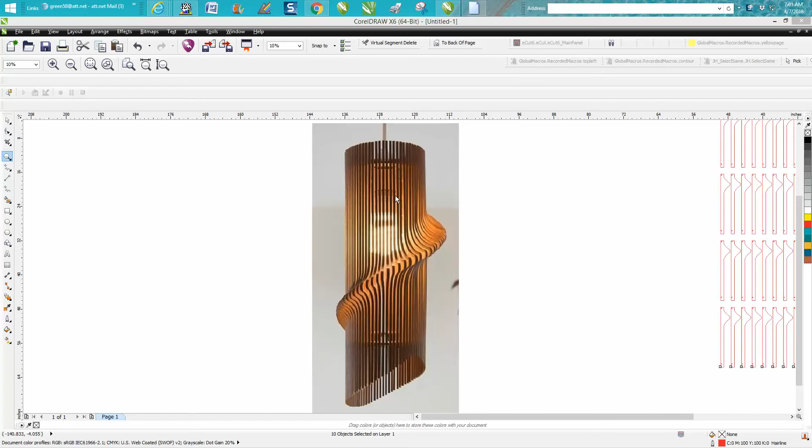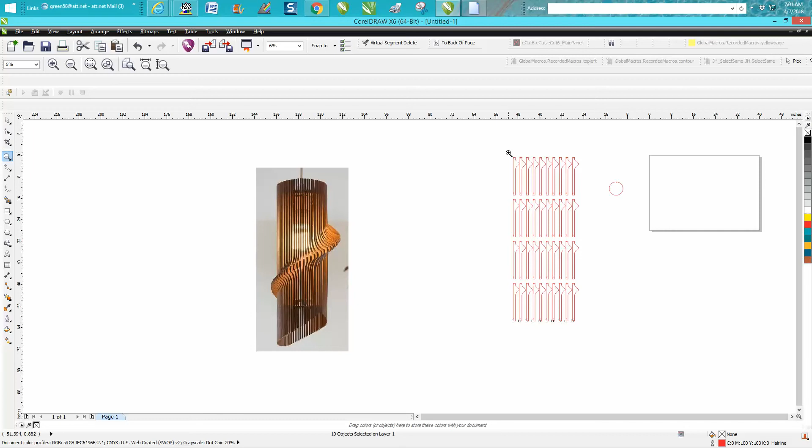You just kind of think about a couple of things, and you have to do some test cutting. And here we go. We're going to design one of these real quick. I have no clue how many vertical pieces are in this. I'm going to say there's 60. I'm going to draw one with 40 because this could be a lot longer than I think it is. So I'm just doing one that's like 14 inches tall by 3/4 of an inch across.

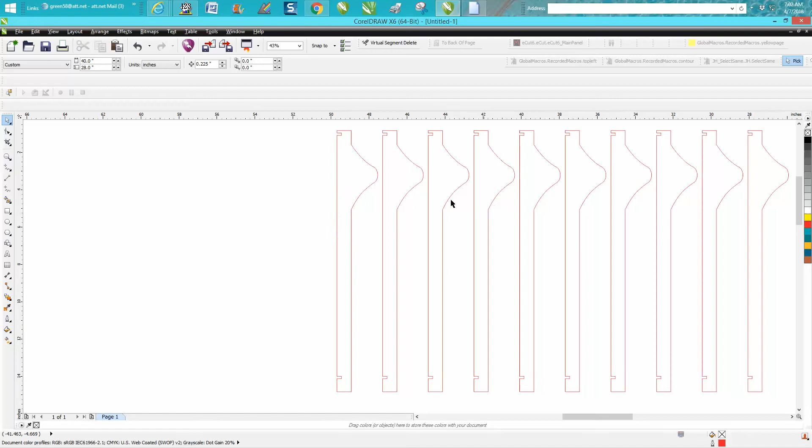So all I did is I drew out the vertical pieces. I put notches, and this is where you'd really need to test your notches before you cut out 40 of these or 60 of these. But then just draw this shape, and I'm not going to get into how to draw that shape. I just added some nodes, and that's one thing about designing. It would be your deal. But let's talk a little bit about how we're going to draw the center part, what's going to hold these together.

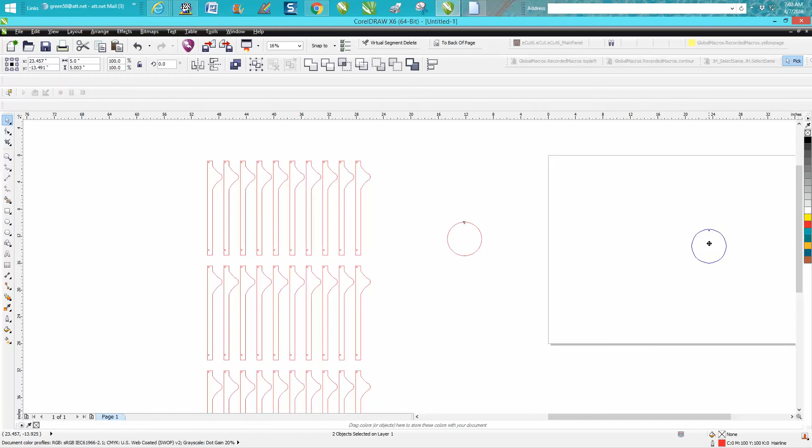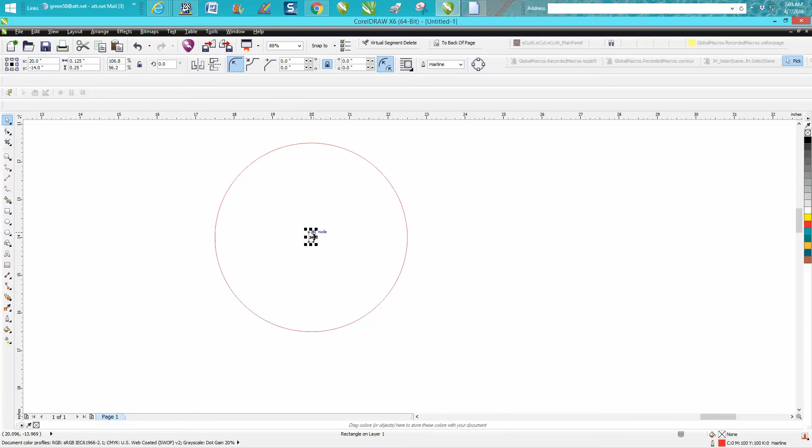So we're going to put this in the center of the page. And I've drawn a notch. Let me zoom in here a little bit. And I've drawn a notch that is 0.125 wide or thick for the thickness of plywood. I would cut this out of plywood because any other wood is going to cost you a lot of money, because this is going to take up possibly your whole laser bed, if not more.

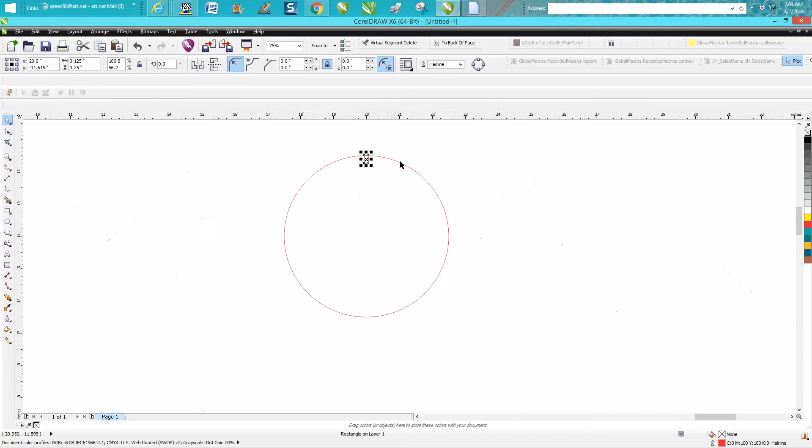I'm going to hold down the control button and I'm going to bring this up just above the apex of that circle. Let's move down just a little bit. Let's set our nudge factor on 0.001. You just really want it just above that. Now, I made another video several days ago on how to rotate this thing. We're going to double click on it and it's in the center. We're going to go to Arrange, Transformation, Rotation, and we want 40 of these. So 360 divided by 40. And it put those around there.

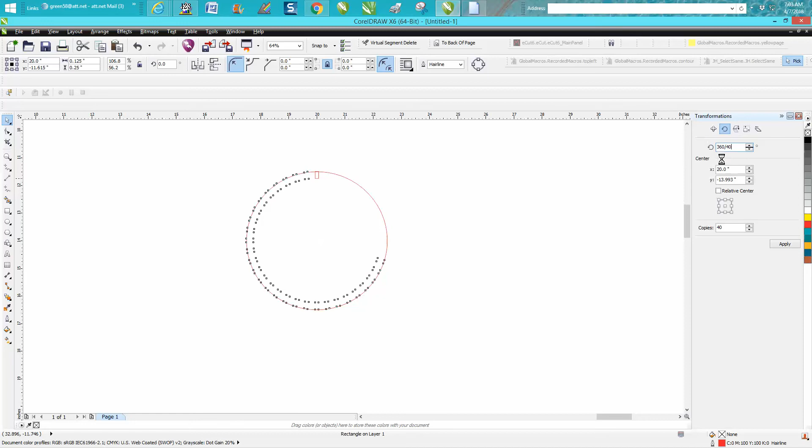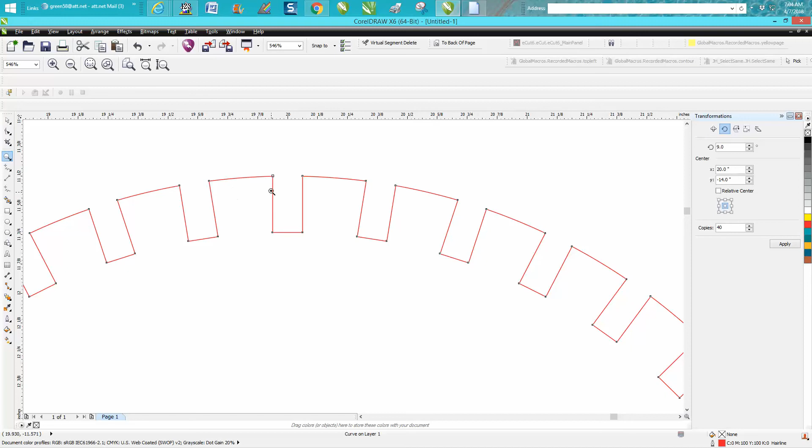Now we need to select everything, weld it with back minus front, and it cut all our notches out. That's pretty cool. Now, this circle was 5 inches. So if you're going to do 60, you're going to make your circles a little bit bigger, I would think. And that's where you would do some test cutting. I would test cut a couple of these and just put some plywood in there and see. You could possibly get these a little bit closer, but you can't make it so fragile that you can't glue it together. So that's the easy part.

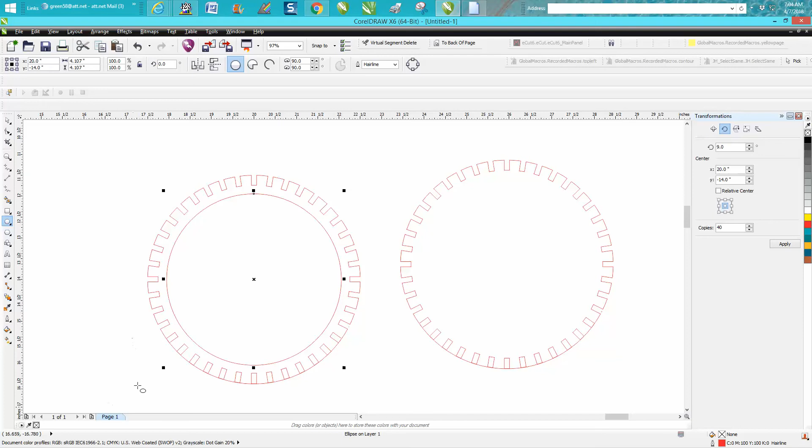So you're going to have a top and a bottom. So you would just Control D, move that one out of the way. And let's say this is going to be our bottom. And we're going to just do like that. There's our bottom, to let the heat out of the circle. So there's your bottom. The top's going to be a little bit trickier because you're going to have to figure out your cord and your socket and what you're going to do.

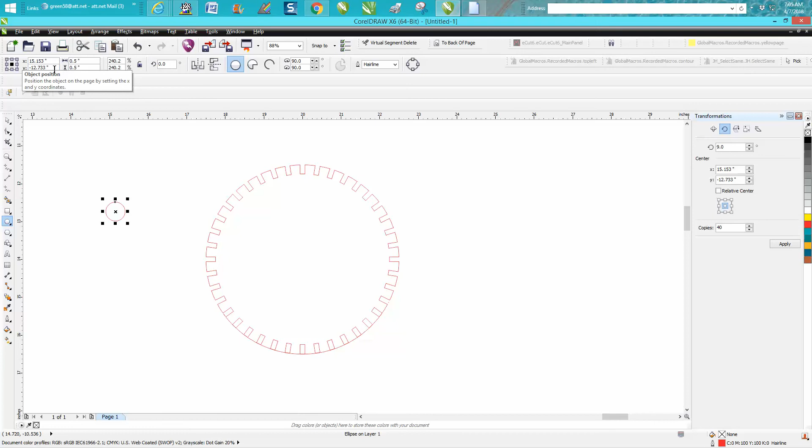So I'm just going to put a 1/2 inch hole, 0.5, 0.5, put it in the center. So there's your top and your bottom. Now that's the easy part. And the other part's not bad.

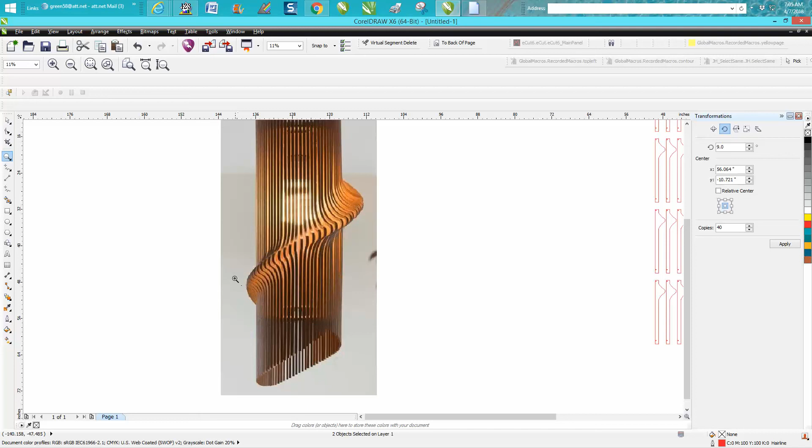It's kind of fun, but let's say you're going to have 40 of these. So you've got 40 identical, but we need to be making them go downhill in a pattern like this. This is what's so cool about this. So I've drawn this out. Let me get just on one.

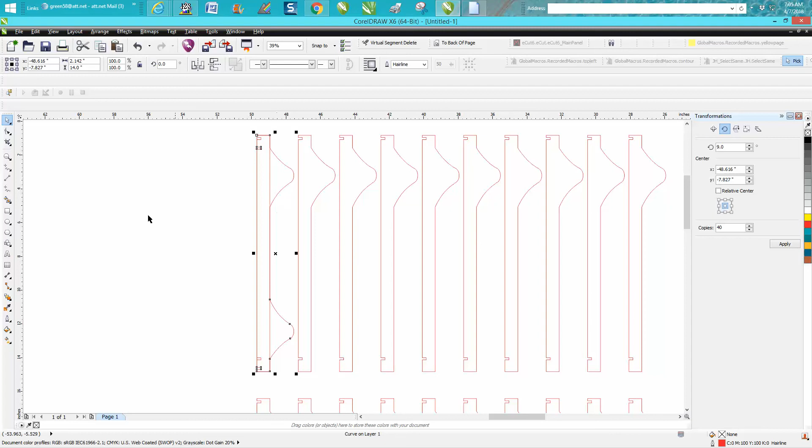And if this is going to be my top, I'm going to make a duplicate and I'm going to rotate it. And now this is going to be my bottom one when it gets to the bottom. So I need to know the distance. I need the distance from that to that, so from the top of the bottom one to the top of the top one. See what that distance is.

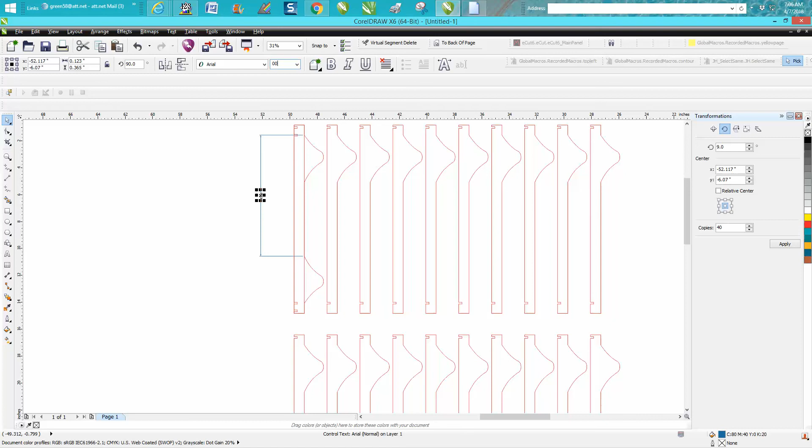I'm going to grab the parallel dimension tool and click on that node and click on that node, and I've got 9 inches. Let me make that a little bit bigger. So we've got 9 inches, and there's 40 of them. Think of that. So take out a calculator and divide 9 inches by 40, and you come up with 0.225.

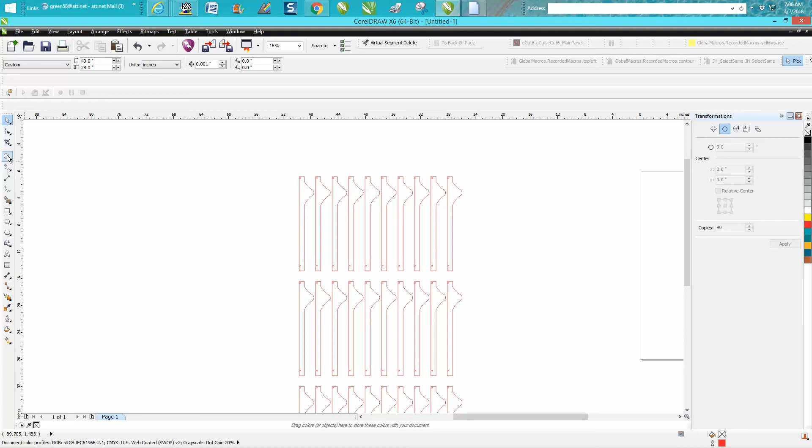Okay. Now this is going to take a little bit of time, but it's not bad. And I'm going to do a couple of them. Now we've got these nodes. We're going to set our nudge distance on 0.225. We're going to take our shape tool. We're not going to touch the first one because we want it. We're going to click on it. We're going to grab these 4 nodes and we're going to cursor down 1 click. We're going to grab these 4 nodes and we're going to cursor down 2 clicks.

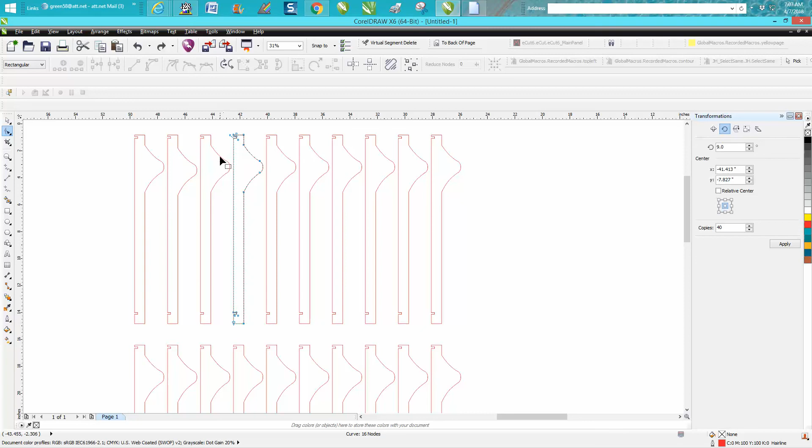And I accidentally grabbed the box. So when you're zooming in here, so here's our third one. Two clicks down. Well, I actually did the wrong one. So let me just kind of back up here. So this is the one we've already done. This is the next step. 2 down. This one will go 3 down.

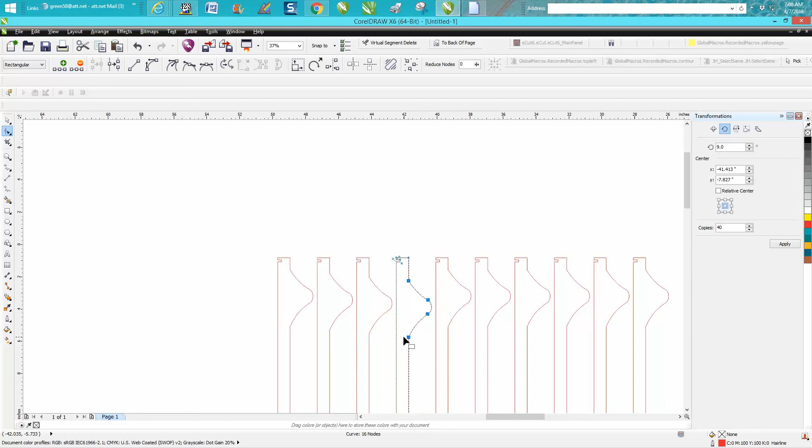Now, if you want to see if it's going to work, go to the last one. Grab it. Grab those 4 nodes and go down 40 times. 1, 2, 3, 4, 5, ... 36. I must have miscounted, but it does work.

Tell you what, let's do that over. I was trying to save people in the video time. Let's just do this one 40 times. And you could change your nudge factor. But 1, 2, 3, 4, 5, ... 38, 39, 40.

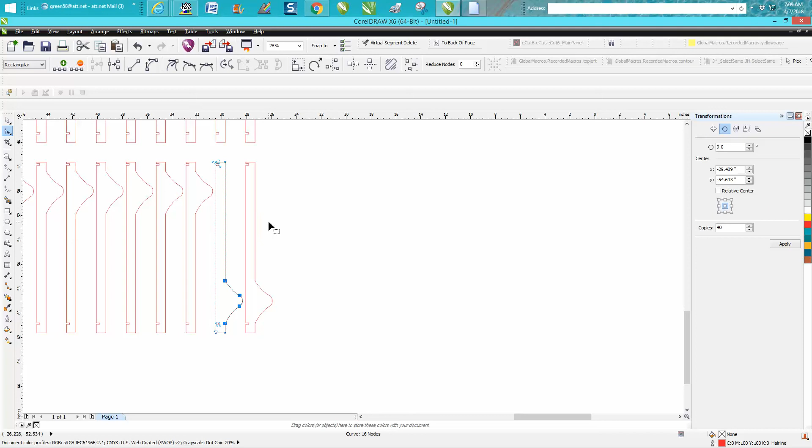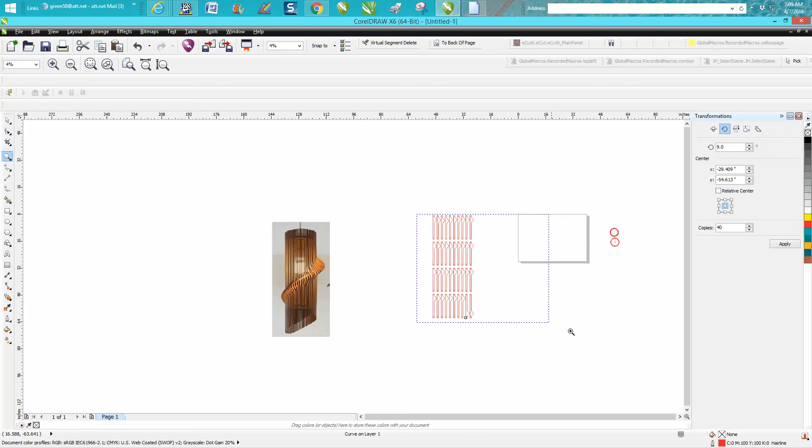So by the time you get to this last one, and I must have been right, it just didn't look right, you'll have 40 different looking things that's going to give you this curvature from the top. The top probably starts over there and it winds all the way around to the bottom. Anyway, sometime soon I'm going to cut one of these out and show you what it looks like for real. But just use your imagination when you're drawing something like that. Use your nudge factor. Use your nudge distance. And as you can see, these are going downhill.